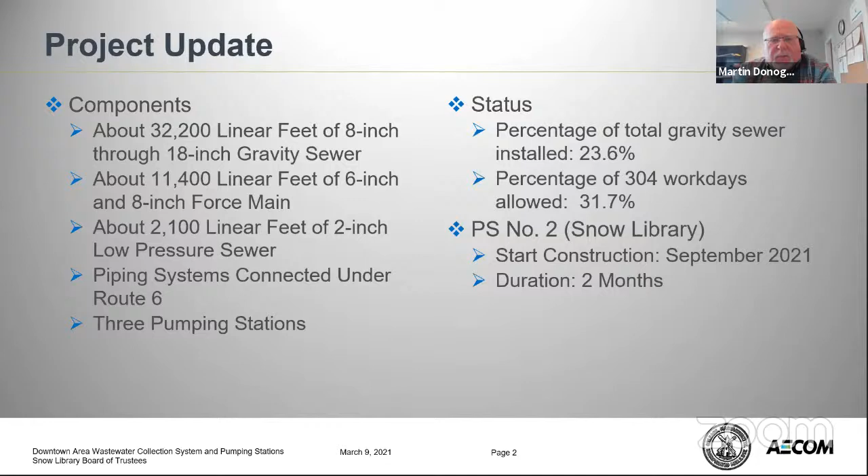The project schedule is that construction at the Snow Library will start in September, and it would take approximately 2 months.

The design considerations for pump station number 2 are reliable and uninterrupted operation, engineered to address initial and future phases of the collection system. Right now, we're installing the downtown sewer system. In the future, other areas of town will be reviewed and are presently under design. Design considerations also include minimizing environmental impact to the Village Green and library property, mitigating odor generation, and standardizing equipment to improve operation and maintenance throughout the systems.

The components include a wet well and valve vault, the underground components. In the wet well will be submersible pumps and associated piping and valves that collect stormwater, rainwater, and sewage, which will be pumped up to Old Colony Way, where it flows by gravity to pump station 1, where it is conveyed to the wastewater treatment facility. At the valve vault and wet well, there'll be an equipment pedestal.

There'll be an electrical disconnect panel. Included in the system is an equipment pedestal, placed up on the hillside, which will include a control panel, alarm system, transfer switch, and an electrical panel. There's also an odor control system built into the valve vault, and a standby generator, also located up with the equipment pedestal on the hillside between the Snow Library and the school.

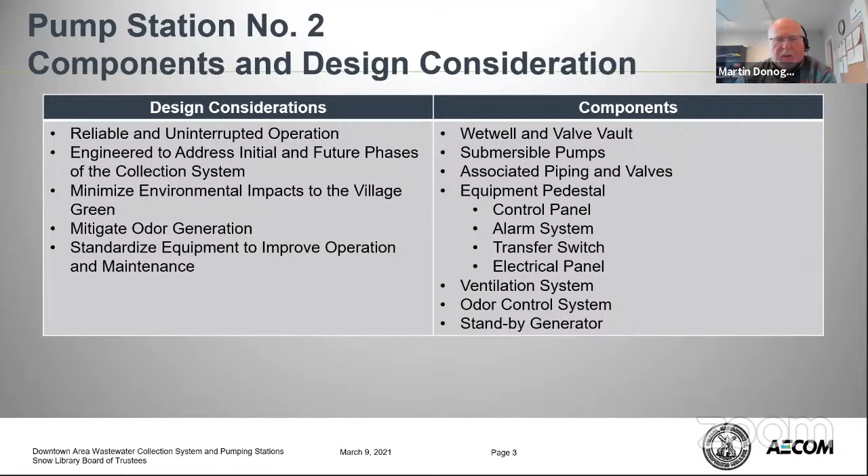On the left, we have a GIS view from the town website showing the library as number 67, and the adjacent Village Green as number 60. On the right, we have an aerial photograph, likely from Google, showing the library building, the parking, and the proposed pump station site. The approved location is in this area. We're proposing that it be installed approximately 170 feet closer to Main Street.

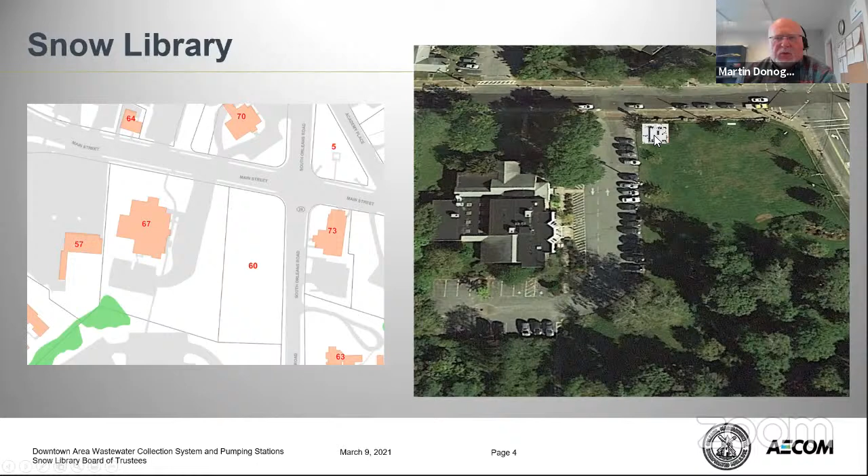This is the site plan that has been approved. It includes several components. I'll identify on the site an existing pump chamber, a component of the sewage disposal system that presently serves the library building. There's a septic tank close to the building, a pump chamber, and a leaching facility in the hillside at the base of the hill. That's the system that presently serves the Snow Library building.

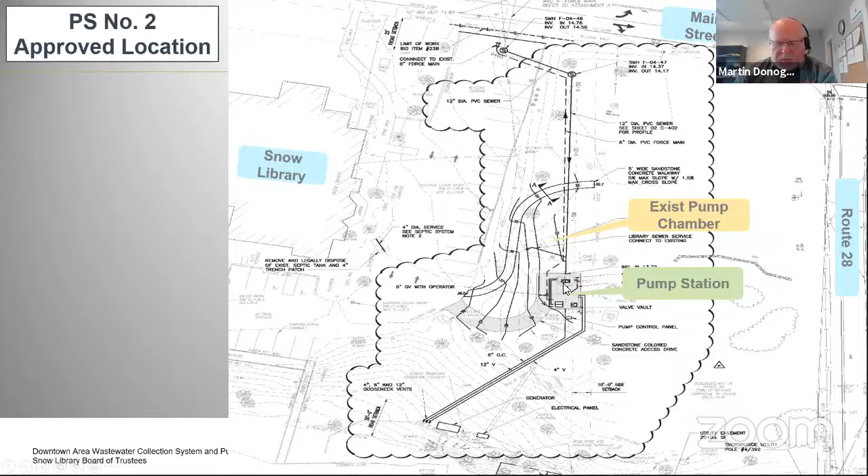This identifies the pump station, which includes the wet well, valve vault, and electrical disconnect. Also up on top of the hill, we're identifying the standby generator location and the equipment pedestal. There'd be a concrete access drive down to the pump station. At the same time, a concrete walkway would be constructed to provide pedestrian access from the Snow Library parking lot to the Village Green area.

The proposed pump station would be closer to Main Street, adjacent to the parking lot. The idea would be to keep it approximately 5 feet from the property line with the Village Green. The electrical service would still come off Route 28, up through the school property through an easement to the equipment pedestal and standby generator, then run along the property line to the new pump station site. This would allow more flexibility in the future for development of the property, for an addition to the library.

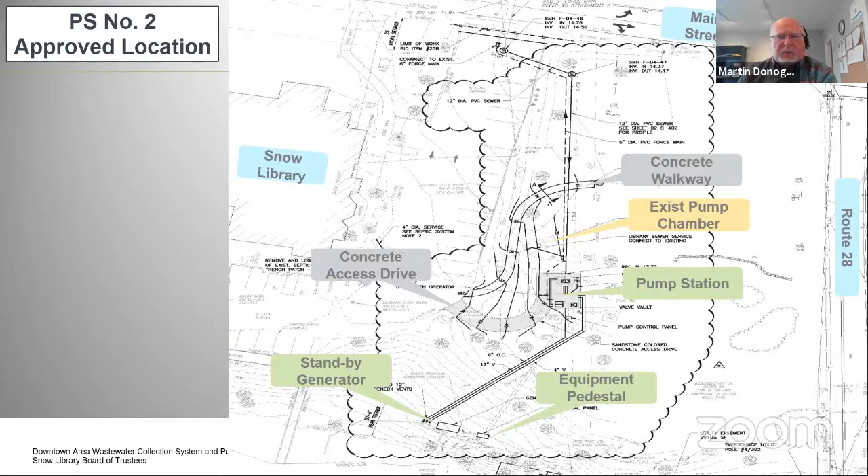The wet well and valve vault would be kept close to the property line, approximately 5 feet off, in order to minimize impact and provide more flexibility for future use of the property. The alternative location will reduce impact to the Village Green's primary picnic area — being out front, it won't be by the picnic benches as currently proposed. It preserves the library's potential option for building and site improvements, maintains the pump station power source originating from Route 28, and keeps the standby generator and control pedestal up on the hillside.

A major factor is that during construction, there won't be any impact on the on-site sewage disposal system that presently serves the library. With construction of the pump station out by the road, there'll be no need to provide temporary service during the 2 months of construction. After construction of the new pump station, they would connect the library and abandon the existing septic system that presently serves it.

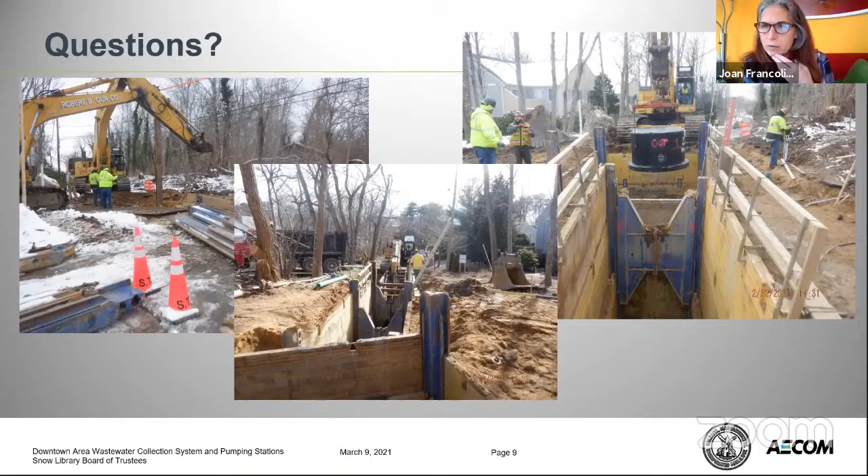Joan? Okay, can you go back to the drawing instead of this question slide? Mark, just go back to where the drawing was. This one? Yeah. So I have two questions. I think right where you're showing it, there's a big green sign now on a big pole that says Route 28. Is that right in line with that big sign that's out there?

It's close to the sign. I can't tell you exactly where it is, but if necessary, the sign could be relocated, and it would be within the right of way of the roadway. So we're 5 feet off the property line, so I think there'd be adequate room for the sign.

Yeah, because I was just thinking maybe you just jump it all together, this way it's not like you see that, then you see the sign. So you would see the sign, and that sign's not so nice to look at anyway.

And then the other question is, when you plant these trees, are you planting trees or bushes or native hedges that are taller than the equipment you're going to put there? Or are you planting small trees so they grow to be taller? My understanding is that they would be planted as fairly substantial trees in order to provide screening right away. Not all of them will be tall initially, but there'll be enough that they show that it would provide screening of the pump station.

Having been in town for the last forever since COVID started, and watching the progress that is slow but steady and to be commended, how much disruption is going to be involved with this project, and what is the timeline? You said it would be installed within 2 months, but I look at Brewster Cross Road, which has been a mess for several, well, are we going into week 3 or something?

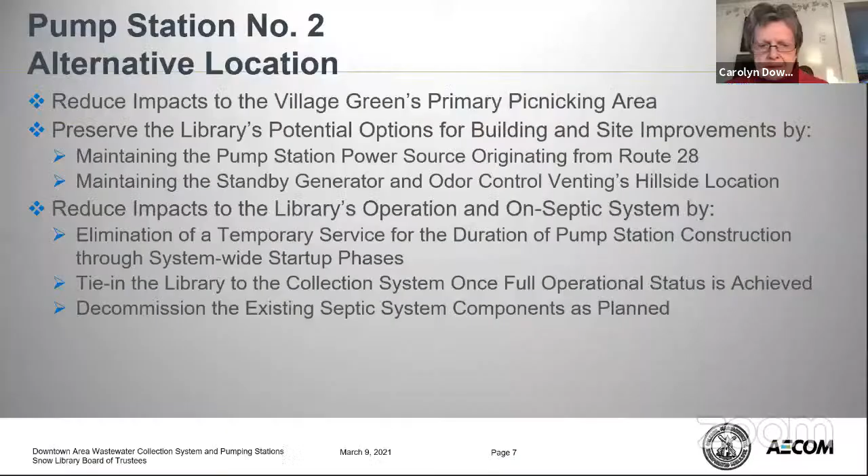Depending on how we have this system, we may have a manhole in this area. It'll probably discharge to a manhole in this area where the existing sewer system will be connected to the pump station. There'll be a manhole, and it's likely the flow from the library will be in that vicinity. So there'll be a new line across the parking lot to either the pump station or to the manhole, the piping that goes out into the street.

So when that part of the project happens, that means the parking lot will be shut down? I think they can do it in lengths that they can work around with police details or flaggers. It's a shallow trench, so I don't anticipate it will be the level of disruption you'd have from construction of the pump station. It's unlikely it would shut down the facility, because during the connection, the existing septic tank could be used as a tight tank.

So you would still have facilities in the building, and cars should be able to come in and out during construction. They'll just have to change the traffic flow depending on where they are on the installation of the pipe. And again, that would be phase 2, so to speak.

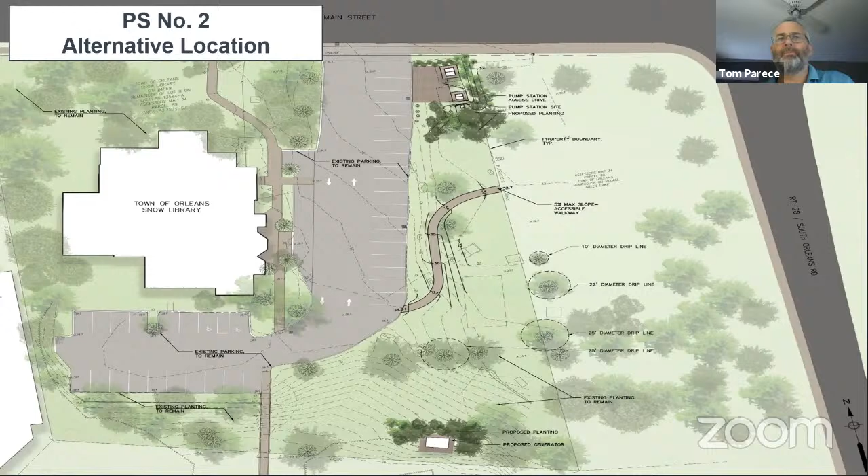Great, thank you very much, Steve. Thank you. Thanks, you guys. Bye. Thanks. Thank you. You can take that off your desktop. Okay, great. Thanks, Reggie.

Well, thank everyone for their attention to that important item. So I think we're ready to move on to the financial report.

Carolyn, do you want to? Yes, thank you. The report for February 2021: under town accounts, expenditures, salaries were $36,997.81. Operating expenses, $23,527.16.

Under Friends accounts, expenditures for Comcast and copier, $212.76. Take Care of Yourself program, $100. Under revolving accounts, deposits: the first of two deposits for state aid for FY21, $4,987.34. General contributions, $120. Postcards and booklets from the Cummings account, $4. Under trust funds, deposits: estimated interest for February, $500.

Thank you, Carolyn. Any questions for Carolyn on the financial report? Okay, moving right along. Tavi, over to you for your report.